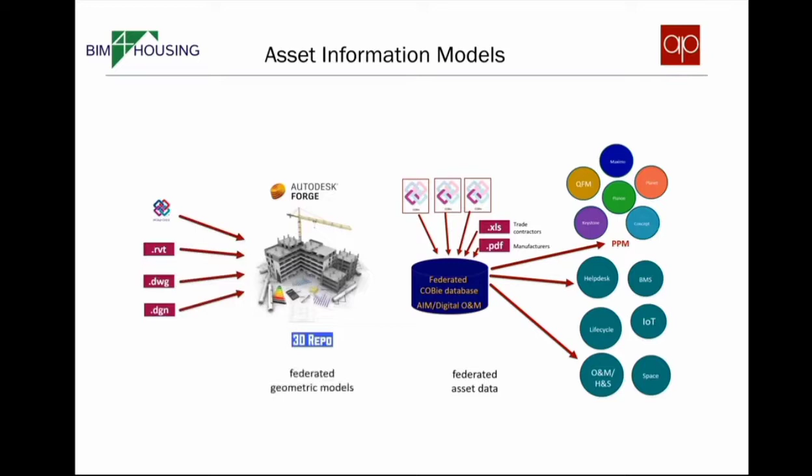Obviously, the thing that everybody is aware of with BIM, thinks of, is the 3D model. And that's obviously a very important part of the process also. But the key thing is making sure that we've got federated asset data and the geometric data together.

And one of the challenges that we have is that the BIM process, typically in detail, the 3D modeling process probably starts to, or comes to an end at the end of technical design, because the teams that are actually doing the installation work are often working from drawings and schedules.

And the result of that is that at the end, we get a data gap because we've gone from digital information to analog information largely.

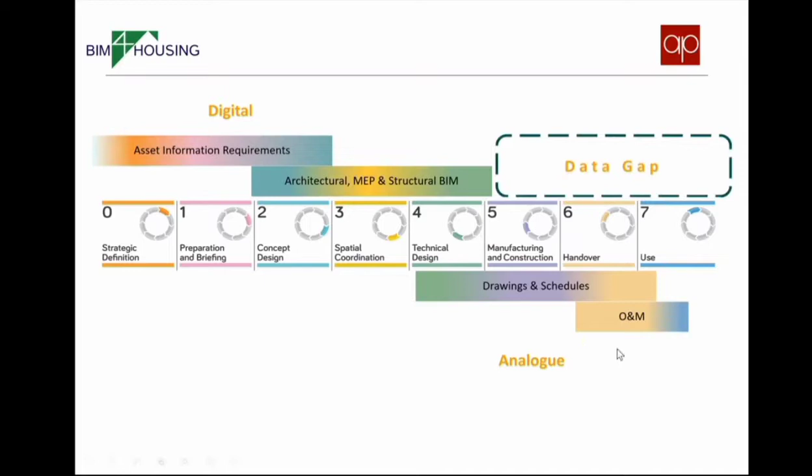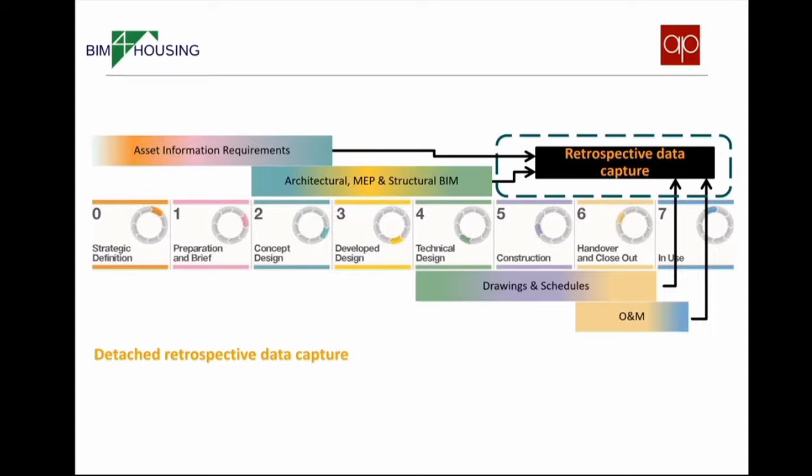And the implication of that is that FM companies often have to commission surveys of buildings that have just been delivered to find out what's gone in them. And that's so common that it's crazy, really. But it's understandable because of the processes that we're operating at the moment.

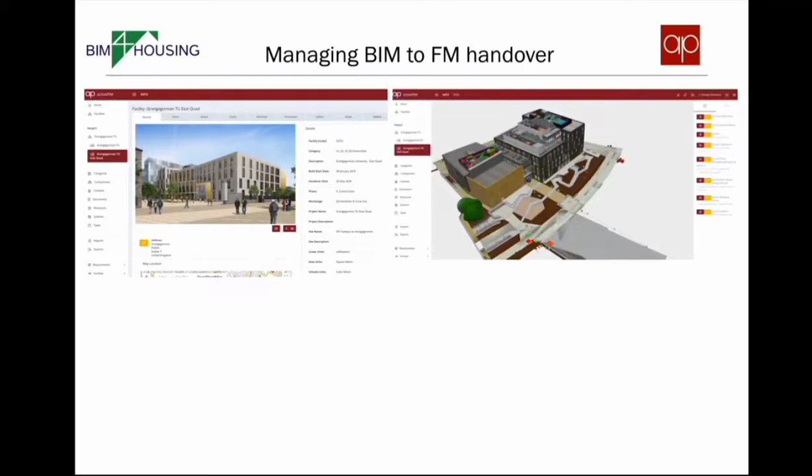We're just completing a project for Sodexo, which is a 250 million euro university complex in Dublin. And we've taken some really well-structured, good BIM data, and we've done all the cool things with it with BIM360. And then we've done the verification.

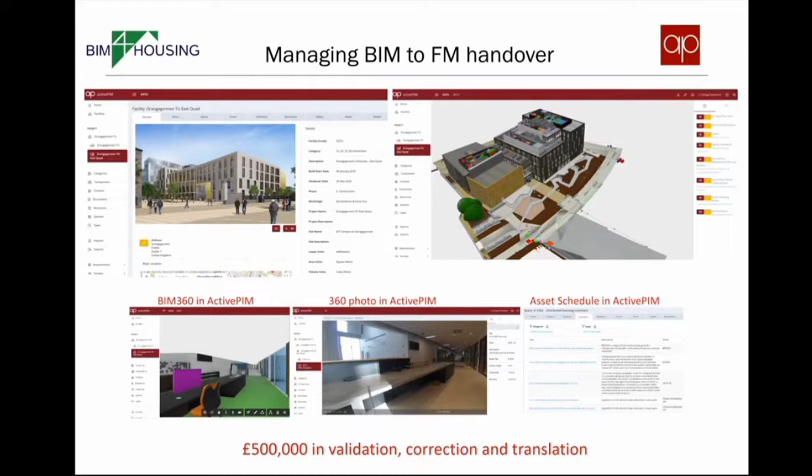But that, in essence, has cost Sodexo £500,000 to do that validation, correction, and translation, which is a huge overhead when, if the information was structured properly at the beginning and we were using standardized data sets, it would have automated that process.

And we're just doing the same on the new Mega Labs project. We've just started on this one, which is now operating. It's obviously a mission critical project for the country, really. But we're taking all the information that the team, as WSP and Balfour Beatty, have done on that and bringing it into Maximo.

Another example, certainly critical this week, is the COVID testing centres. Sodexo were tasked with creating 181 asset information models in two weeks, which meant visiting sites, largely car parks where porta cabins are being dropped in. So they're very simple, but still critical, and 181 is a lot.

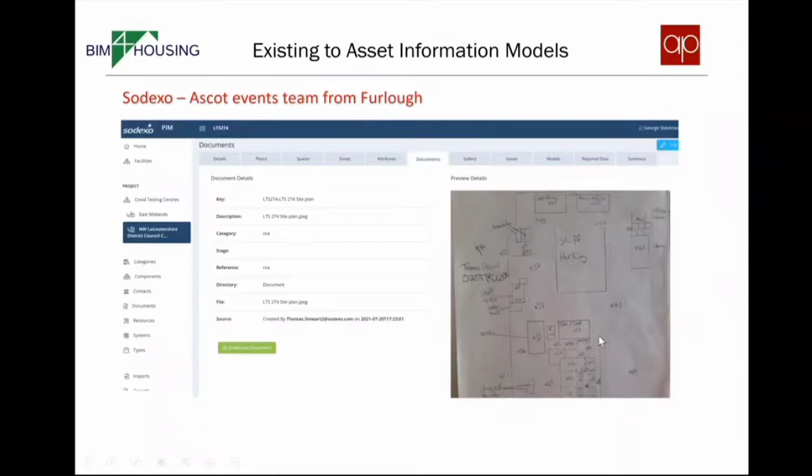They didn't have enough surveyors to do it, so they brought back in the events team from projects like Ascot. They've got no building experience, but they brought them in from furlough, and because they're bright people, they were able to put them on site and they produced very basic sketches like this of what the car park layout was.

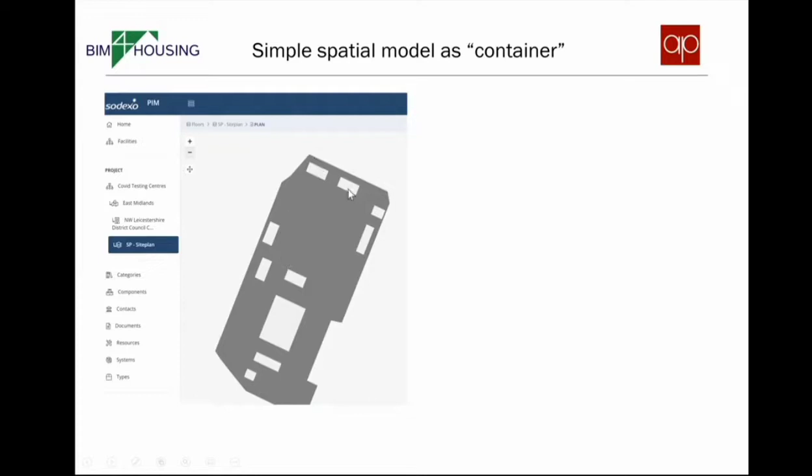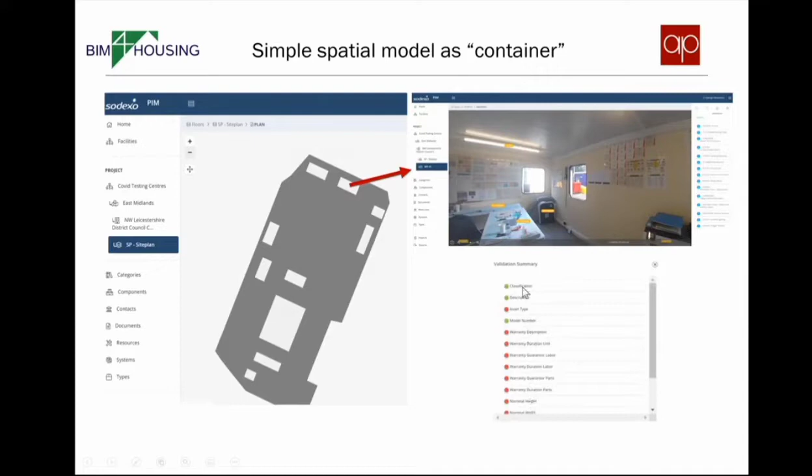We were then able to use that to create a very simple asset information model. We used Google Maps to position it so we've got the right orientation, and then this is an intelligent spatial model into which we could drop 360 photos. Those were then used by subject matter experts to go through and pick out what those asset types are and produce an asset list. Because it's in proper digital information, we can then automatically validate it against the requirements.

That tells them what they now need to go and collect. We've done a similar exercise with Peabody on one of their schemes, largely from the O&M information. We've taken that, created a spatial model they can use to more effectively do the safety case review on that project, and we've now been able to use that on a new scheme they're building, managed through the new design and construction process.

Finally, as an example, this is Origin Housing, where we've worked with PRP architects who have done laser scans of the building and created Revit models from it. We've brought those into ActivePIM, generated the schedules of the principal asset types needed, and can also present it in a plan that is a lot easier for the asset management team to work with, and indeed the fire brigade prefer it that way too.

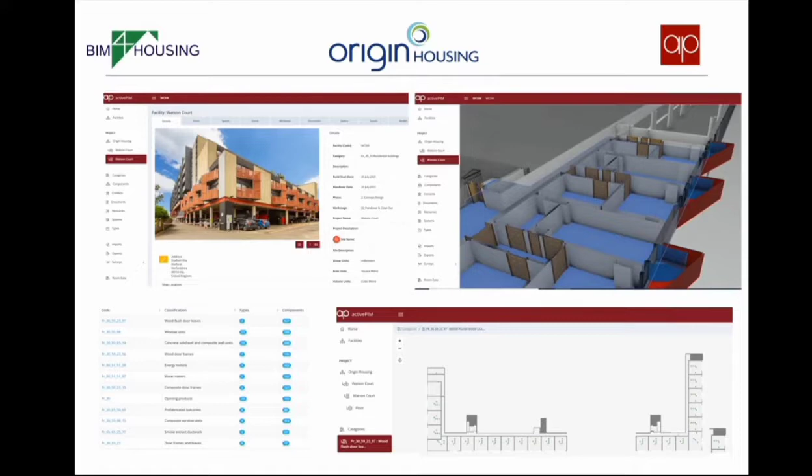The reason I'm showing you these examples is that I think we need to find better ways of collecting information from people who are not BIM specialists, but are still very knowledgeable.

The other challenge is that the way information is currently delivered from a handover perspective, even on new builds, means we don't actually know which doors are fire doors. There might be 1,000 doors in a building that are FD60s or FD30s, but only 150 of them are actually acting as fire doors. Without that information being clearly articulated, we could end up with FM teams having to spend 15 minutes a month doing inspections when there's no need for them to do so.

Similarly with fire dampers and fire collars, it's very unusual to see information that tells you specifically where all the fire stopping is. Often you might have a PDF with some marks and symbols on it telling you where things are, but that's extremely difficult because it's not actually telling you from a spatial perspective where they are. You've got to read it as a human and interpret it.

With things like infection control, we're starting to have to think about what ventilation is supplying which spaces, and that sort of information isn't normally modelled in the BIM models. Also things like sprinkler heads - the workshops we've had with subject matter experts have told us that partitioning can often really screw up the sprinkler head spread, as it were.

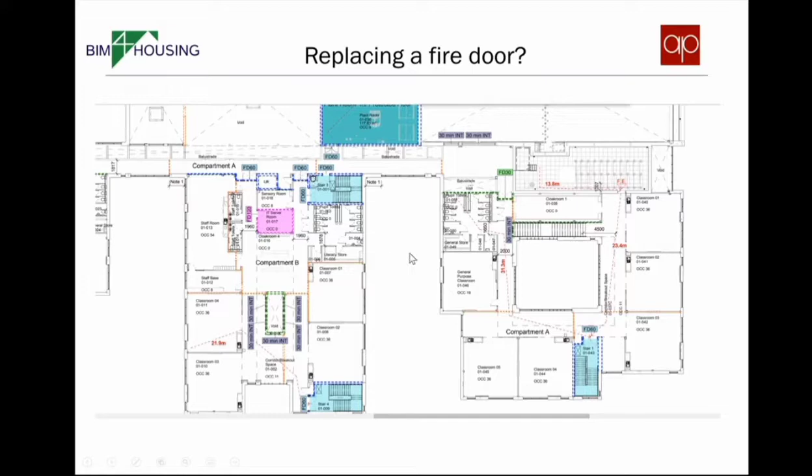One of the challenges we've got is it's almost like Where's Wally when we're trying to find a lot of this sort of information. If we're looking to replace fire doors, for example, we probably end up having to look at a plan like this and pick out just from the symbols which are FD60s or FD30s. But to really understand the context, we also need to look at probably the fire compartmentation drawing, and this information is not necessarily well glued together.

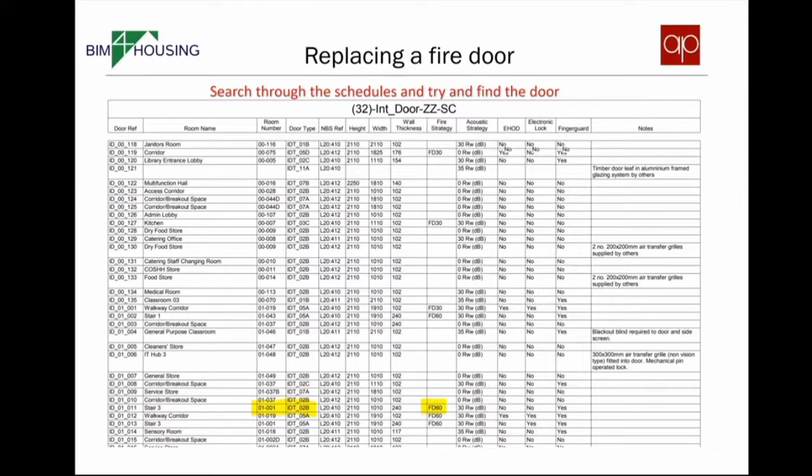Also, we might then have to go and reference a schedule. This particular project that I'm showing you here was actually one of the BIM exemplar projects, but actually most of the real information was in schedules and PDFs, and also the specification, for example.

And this is something that we need - in the asset management world we call it line of sight - so that we've got a clearer way of articulating what's needed. If we look at...

There's a question mark as to whether PDFs are actually digital. Well, they're not really machine readable - a human needs to read them and interpret them. And how do you know whether you've missed something? So, for example, if we're looking at fire rating, was it included in all the data sheets? In my experience, it isn't always there.

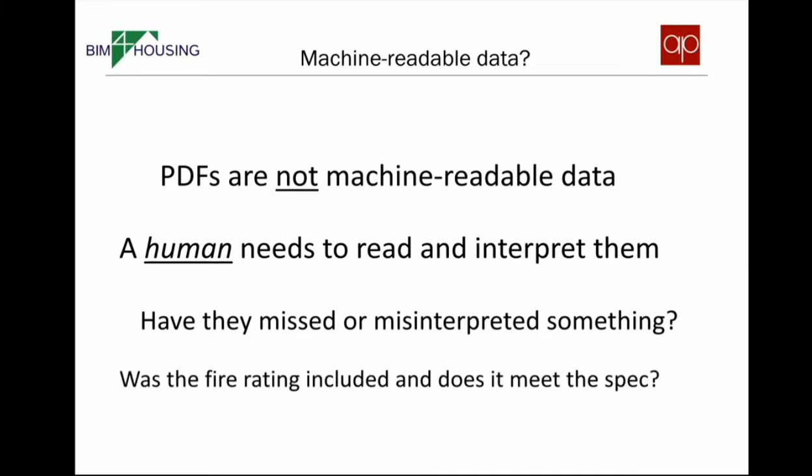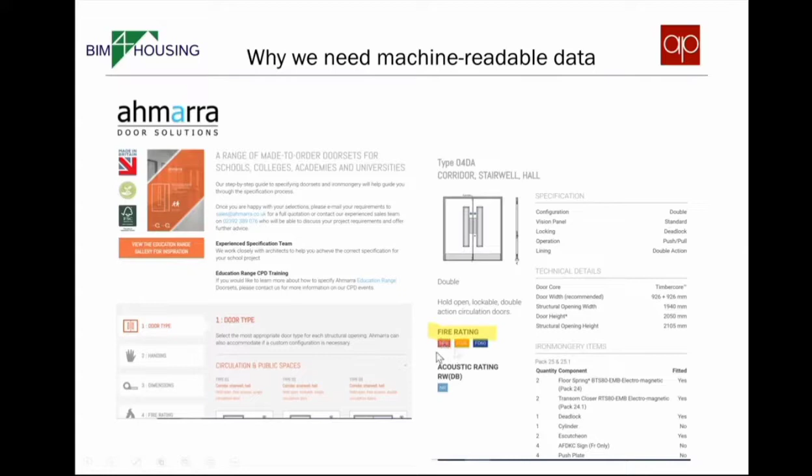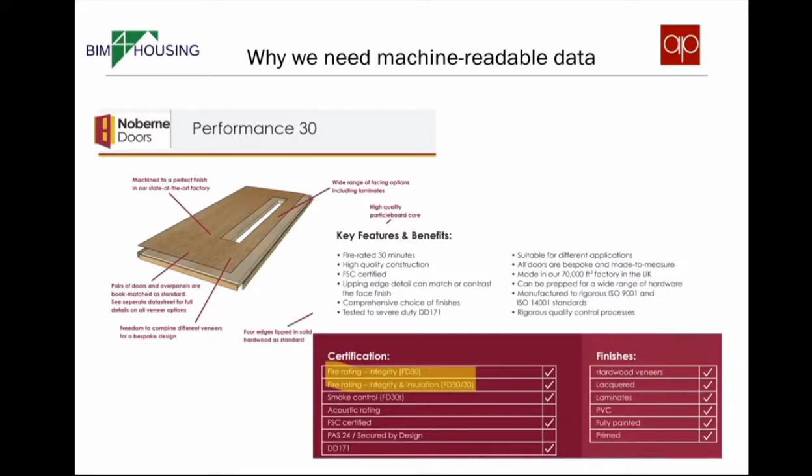Here, for example, we've got a data sheet from one door supplier, and you can see that's the way they express the fire rating. If we then look at a different door manufacturer, who may be on the same scheme by the way, they're expressing it differently again. And here's another one. So they're all providing the information, but a human needs to read it - this is not digital, machine readable information. And by not providing it in digital format, we can't really use any of the smart technologies we want to be able to do that validation.

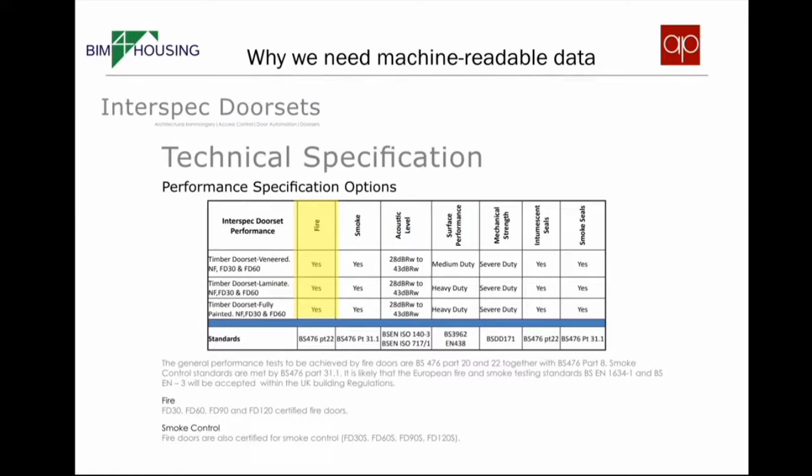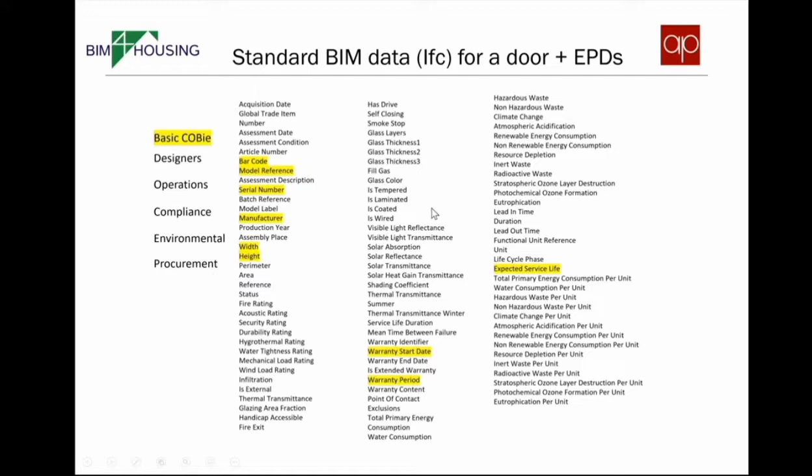It's needed probably by the environmental team, it might be needed by compliance or the operations team. So the principal thing here is not to say this is too much information - it's looking at how we can gather that information more easily and then present it to the different stakeholders in a way that they can consume. And that's the approach that we've been taking.

One of the things we're finding, and it is concerning, in asset information requirements that are often written - and we're seeing quite a lot - people are really focusing on just what's easy to provide, which is the absolutely generic COBie data. So the standard COBie data that people focus on is the type information, which is generic to any type of product - doesn't matter whether it's a door, a pump, a boiler, an air conditioning unit, or a cladding panel. This information, who's the manufacturer, the model number, the warranty, etc., is absolutely generic. Similarly, of the component information, that's basically just how many of them. The key thing is the attributes.

Now I'm concerned because we're seeing in AIRs people saying that we don't need the attributes - I saw one last week - so we don't need the attribute information. So what that means for, let's say, a fire door, is you won't know what its fire rating is, you won't know whether it's got smoke stop, you won't know what the door closer is. Now somebody might say, well, you can get that information from somewhere else - you can probably get it from a data sheet, you can get it from some schedules. But if that's the case, how do we know that it's being provided? And again, it's not machine readable or machine actionable.

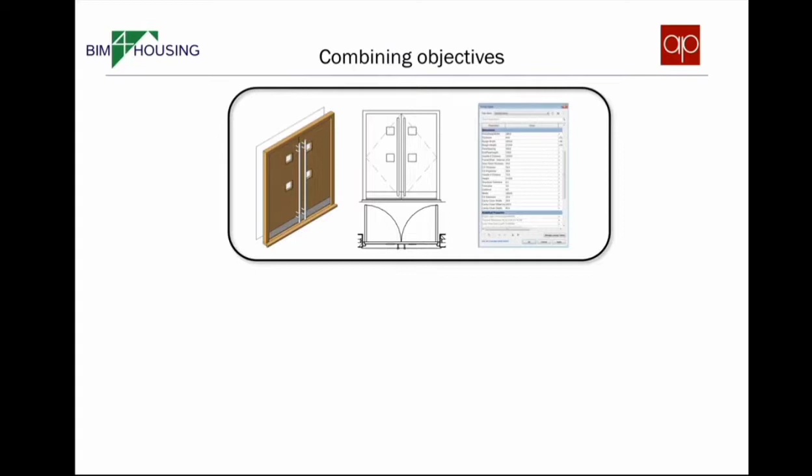So we then end up with something that can be used by whatever software application the parties are using. And the way in which we're following that through, the principal driver when we embarked on it a few years ago was for asset management. So as we all know, that's what BIM was intended for in the first place. That's why the government invested in it, to be able to provide better asset information.

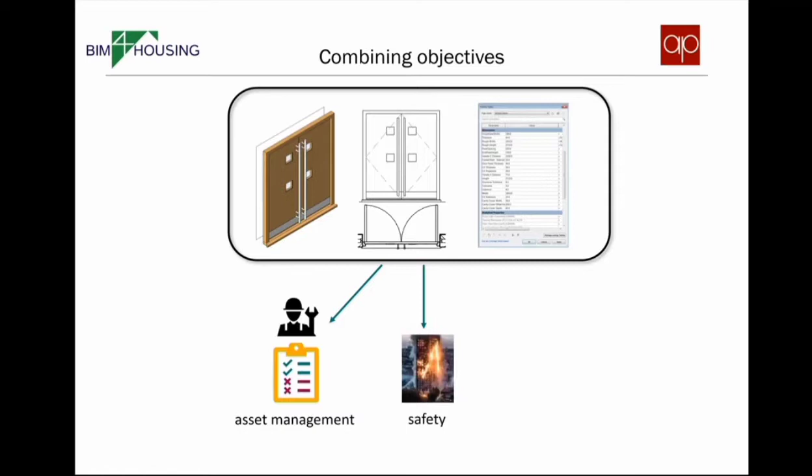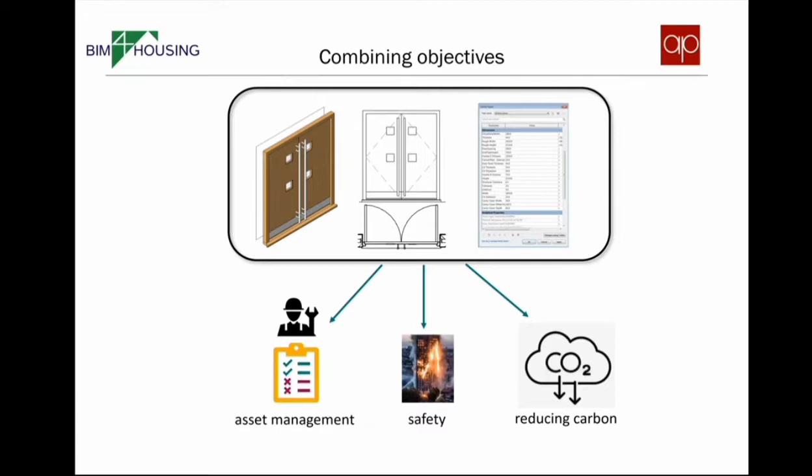But since Grenfell, we've recognised that if you know what doors have gone into the building and you can hold information about them from an asset management point of view, you can do the same with safety. And now, one of the things that we're pushing for with Construct Zero is you can do the same with the carbon information. So we've got a triple whammy here if we can get that process right, so we can procure the right information, we can quality assure it as it's coming through so that we don't have to do resurveys and reworks. And that's really the purpose of what we're trying to achieve today.

So the overall intention here is that with the golden thread, we're trying to standardize the way building standards and regulations are produced. We're trying to standardize a lot of the procedures that are going to make the building more safe. And we're then trying to consolidate those into reusable libraries, which then, because they're standardized, we can use modern technology to validate that information.

So the asset information requirements shouldn't be issued as a document that people need to interpret. Those should be digital information requirements, which then can be issued to product manufacturers. So the product manufacturers are able to verify that the products that they are offering to the supply chain have already been pre-qualified in terms of the information.

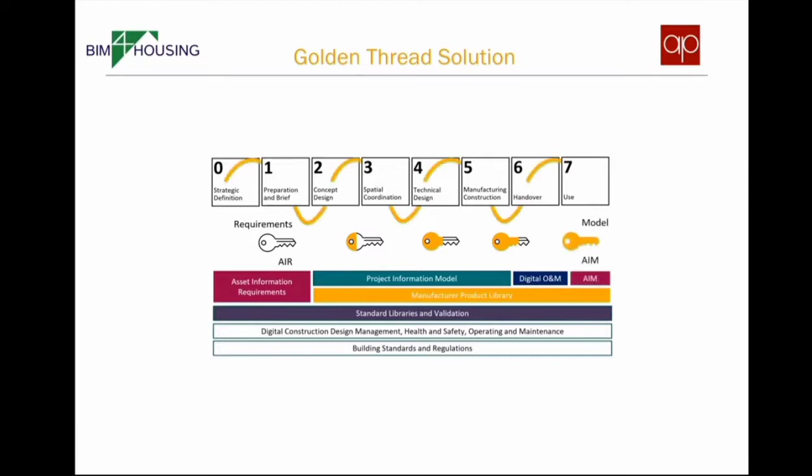So your digital information that you want at the end is actually being built into the process. If we can then also record where things are being installed, and there's all sorts of things that the industry is doing some cracking work on in that area, we can then generate a digital O&M. It's an automated output from the process. You don't need to have teams phoning up suppliers to get them to supply information. It should be coming through that process. And therefore, we end up with an asset information model that can be managed in the long term.

So the challenge that we've got, the biggest challenge that we've got, is the existing buildings. And we've got 12,500 that are in scope, but the scope seems to move. And in fact, I'm led to believe that we're actually looking at coming down to 11 meters at some stage, which is going to probably quadruple that figure.

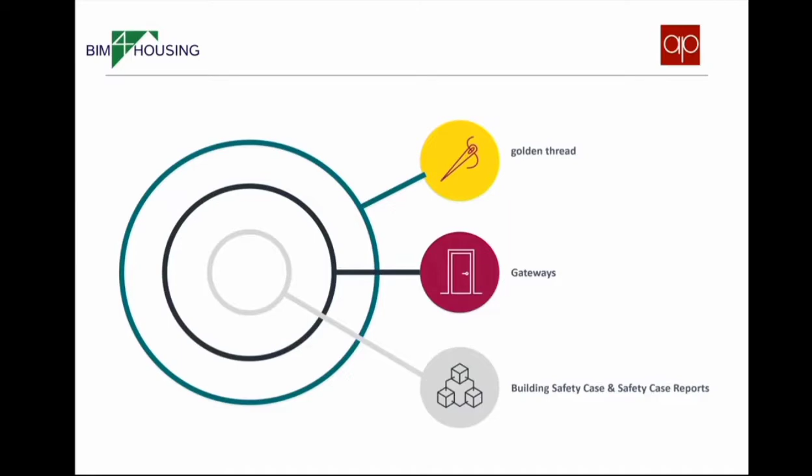And we've got a range of different tools that are coming into place to do that. We've got the golden thread, we've got the gateways, and we've got the safety case reports. And the definition of what needs to be in the golden thread, the pressure is really on the duty holders, because they're the ones that are actually responsible for knowing what they need to know to keep the building safe. And that's a very open-ended question.

And it's about making sure that they don't really know what is required, because the HSE or the regulator won't tell them what is required. It's a little bit like CDM, as I understand it, in that it's not a matter of the HSE being prescriptive, they're actually looking at what risk is and then how you can work back from that.

But what we do need to do is make sure that the information is structured so it can be presented in different sorts of ways to residents, for example. And we also need to make sure it's easily kept up to date and maintained. And therefore, by making it fully digital and coordinated, we can present it according to the way people want to see it. Now, if you're anything like me, there's so many of these different initiatives underway.

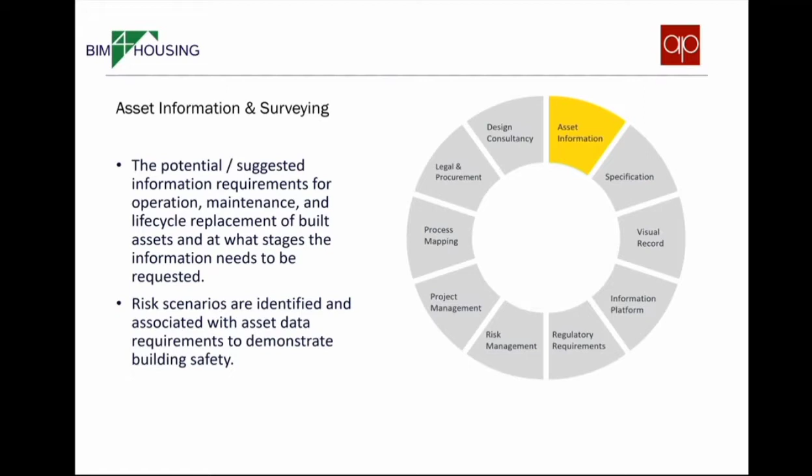So we were asked to look at this from a risk perspective, which I must admit flummoxed me a little bit because I hadn't thought in that way. So we started looking at how we could draw on the experience of the people in the team to actually come up with what risks people have, what are the things we need to protect against, and then how can we relate that back to the assets involved.

That led us to looking at how we could draw that together into a safety case, so we started looking at what information was needed to write a safety case.

We worked with people like PRP, who are actually doing this for quite a few housing associations, and they told us - along with the team at L&Q who've been working on this - they identified what documents were needed to actually support that.

We've created a checklist that can be used by a housing association to draw together all of the information, all the documentation they need to demonstrate that safety case.

What we're also doing is using this 360, the visual record, to be able to capture this information. I think generally most projects now are using some sort of 360 photogrammetry to manage quality and manage delivery.

This information we can use in the same way to verify that the right product's been installed, and then use it going forward. The specification team, the interesting point is that they're transforming from being a performance specification to saying that we need a prescriptive specification to be settled.

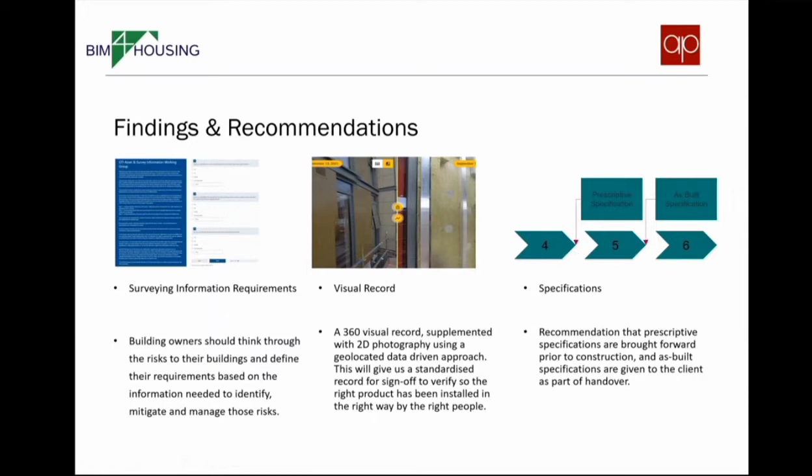That's a massive transformation for the industry, particularly from the point of view of procuring M&E, when in most cases - certainly in my experience on D&B projects - the M&E subcontractors aren't even appointed until the beginning of that stage. But that's something I think everybody agrees we should be moving towards.

But obviously there are some implications we need to be tackling.

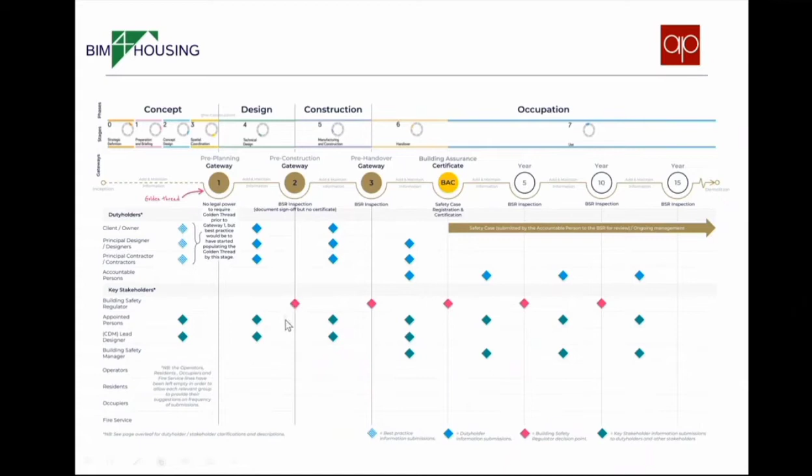So as part of this process, we needed to go out to a wider group to be able to contribute their knowledge of what risks are involved. So I was able to tap into the BIM4Housing.

I don't know how many of you know what we've done at BIM4Housing over the last 18 months, but what we've done is we've moved it from being about 3D modeling to being much more focused on better information management, which the UK BIM Alliance is basically making as a standard now anyway. So in other words, what we're really focusing on is the information side of things rather than the technology.

And we've created a number of different working groups. This has been very active. So we've got 6 working groups that are addressing the different topic areas, different stakeholder groups. What they do is identify a particular topic, and then we establish with representatives from each of these groups a work stream. The work stream works intensively for probably 3 to 6 months, addressing particular topics.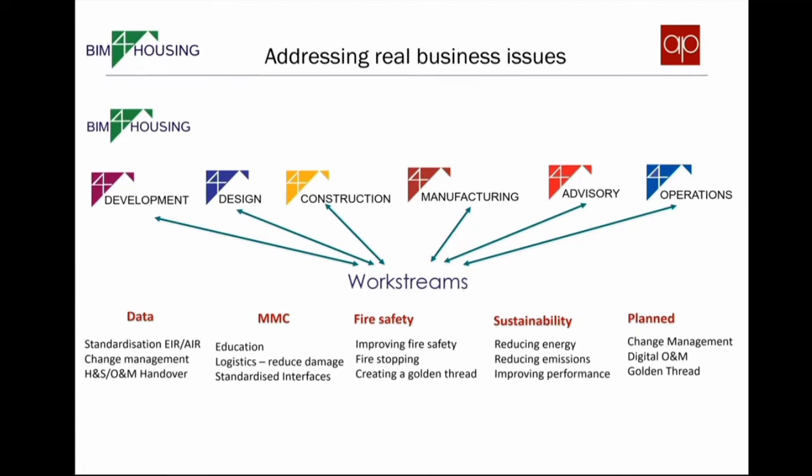The point about the work streams is that they've got a defined outcome that comes from the agreed working groups, and they then deliver against that. And then, once it's done, we don't want them to be talking shops. We want them to be actually action-led.

So the fire safety group, we formed these roundtable workshops where we brought together subject matter experts in fire doors, fire dampers, sprinkler systems, and Paul McSolly, for example, who's on this call, is a subject matter expert in a number of these areas. He was able to get together with other experts, and the result was that the teams on the call learned a huge amount from each other about what information was needed.

Now, I'm going to break there because I've been talking for probably half an hour or so, but I will show you the work that we've been doing. I'd like to - oh, there's just one other slide that I wanted to show.

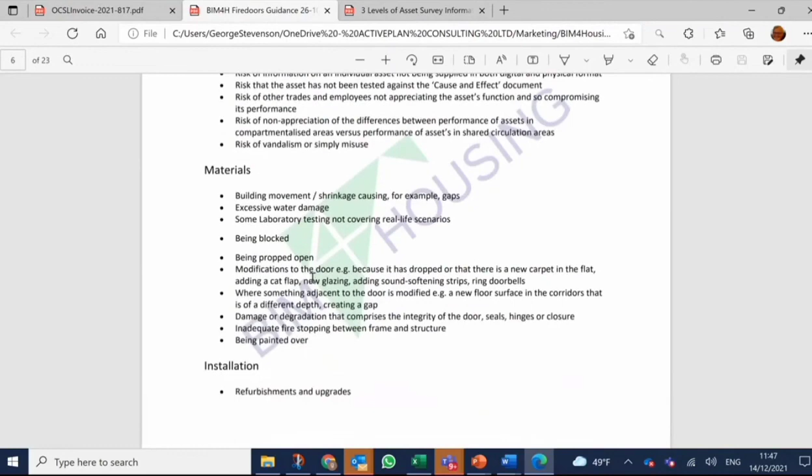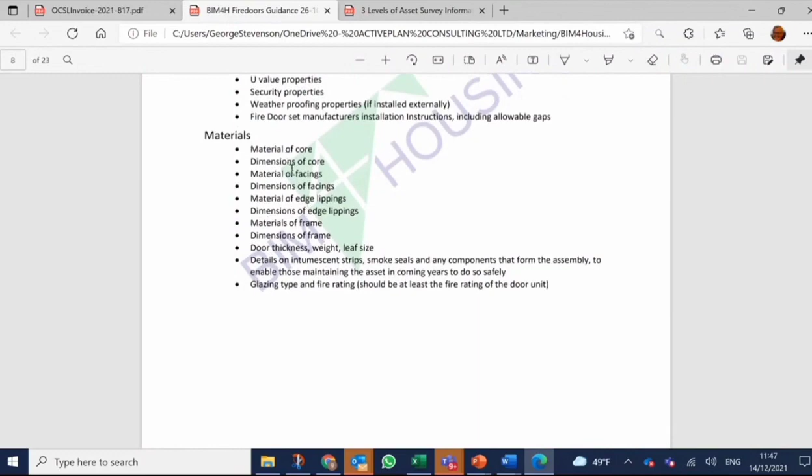We've then got the things that people do to a door to stop it from performing, whether that's somebody - maybe even the tenant. And then what information is needed - at a general level in terms of requirements, specification, then the information about the materials. Now that's obviously partially needed from a safety point of view, but it's also really useful from a carbon zero point of view.

The construction information - how was it installed? What's the mechanism for inspection? Now there's a hell of a lot of information here, but I've spent the last few days going through this with building safety managers, and they say this is exactly the level of detail they want to occasionally tap into, but they don't want to have to hunt for it by going through O&Ms to find it - the same with procedures.

So what we're trying to do here is follow the methodology we use in hospitals with M&E. All the M&E contractors employ very skilled and competent engineers, but they still issue them a work instruction when they're maintaining an air conditioning unit, saying these are the 10 steps we expect you to follow. So that's the process here - to have these as clear instruction sets that we can follow.

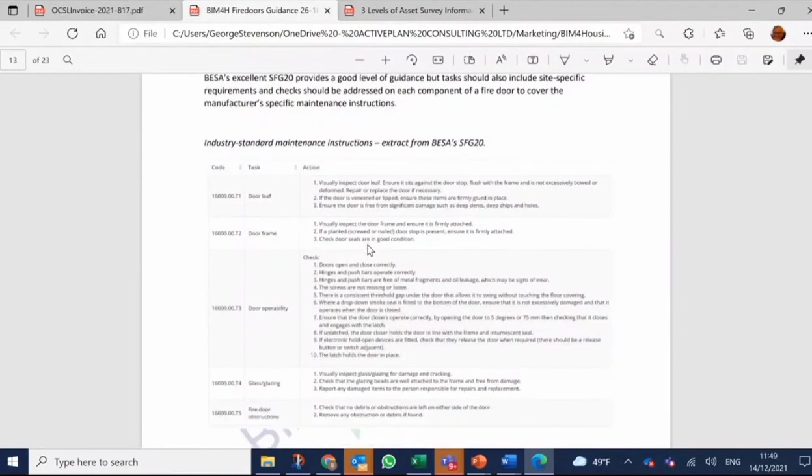Similarly, airline pilots - when they're taking off, they've taken off 1,000 times, but they still go through a checklist, because it's a belt and braces process and you've got some sort of audit trail. So this, for example, is from SFG 20, the standard for a monthly inspection of a fire door. If we can standardize to this level, it's going to make it a lot easier for us to ensure people don't make mistakes.

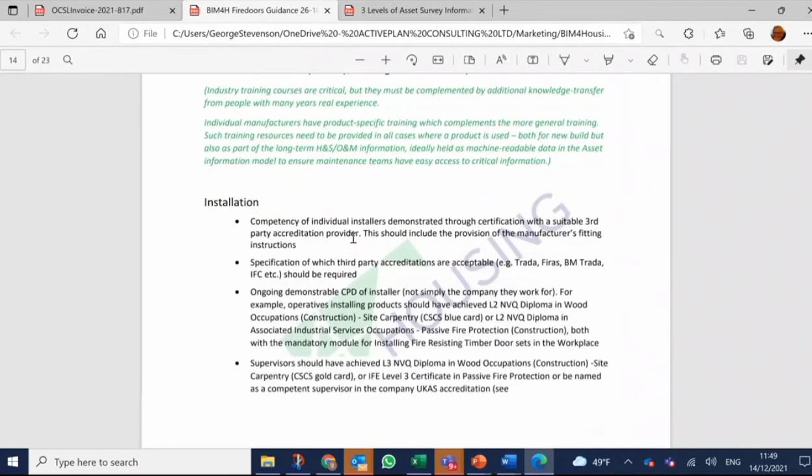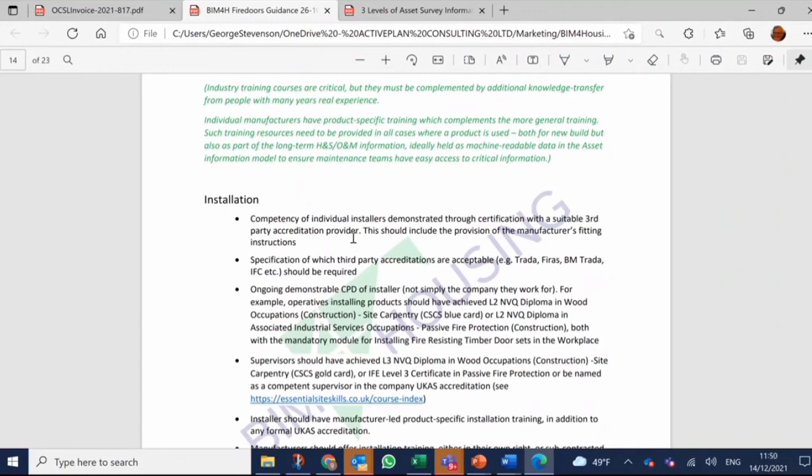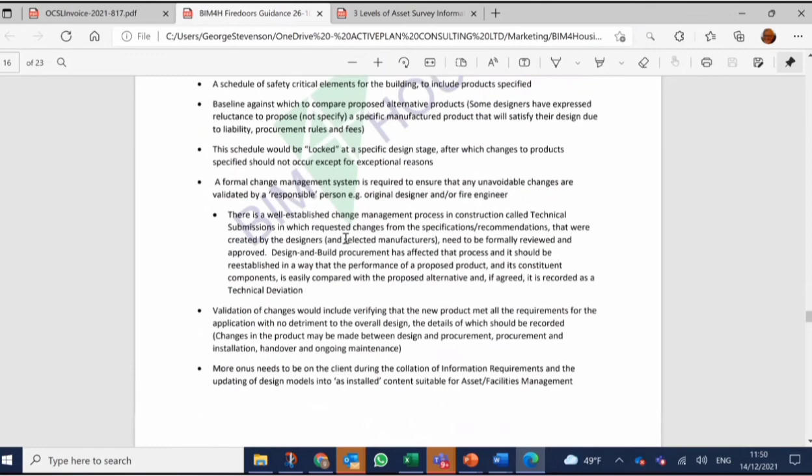And then in terms of competency - on the call yesterday we had Andy Frankham, who's actually defining the competency, working on the team defining what a building safety manager needs to be able to do. So competency is obviously critical, but it's a matter of having the right competency and the right evidence of that, plus the procedures. And then finally, on to change management - how do we manage that process? So we've done that for all of those different asset types.